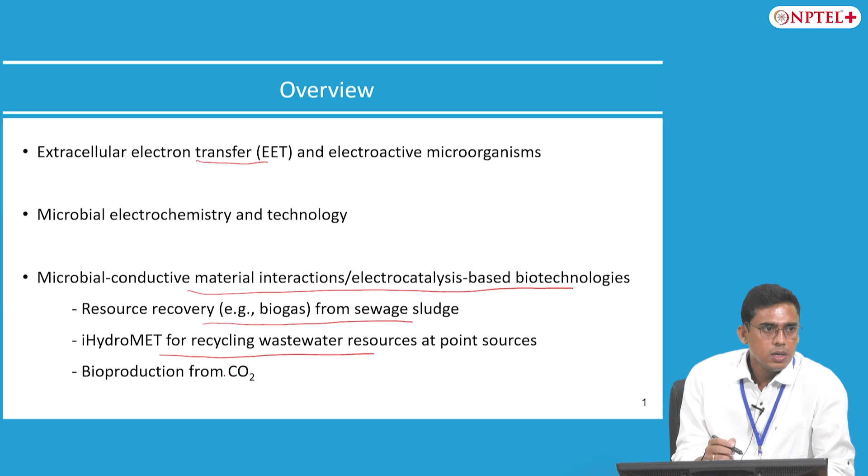So, because when electrochemistry comes into the picture, electron transfer is very important. Now, how is this microbial electron transfer linked to electrochemistry? So, to understand that, it is important that we first try to understand microbial electron transfer processes. So, as you know, the flow of electrons basically is very important to all metabolic processes in life forms, including higher eukaryotic organisms like humans also.

So, in our case, how exactly is electron transfer involved in respiration? The oxygen that we take in is reduced at the membrane level by certain enzymes in order to complete the respiratory processes. Now, in case of microorganisms also, basically they have the advantage of using different kinds of electron acceptors. So, in natural environments, they always try to use the electron acceptor with the highest reduction potential and the electron donor with the lowest reduction potential for maximizing their energy gain.

Now, in our case, we don't have that liberty. We can just respire using oxygen, but microbes can fine tune their respiratory processes according to the electron acceptor that they can access in a particular environmental setting and so on. Now, just a simple example in bioenergetics or in energy metabolism, if you take into account glucose as a substrate or electron donor and oxygen as the electron acceptor, basically this is the common pair in aerobic respiration. So, this is done by most of the living beings, including humans.

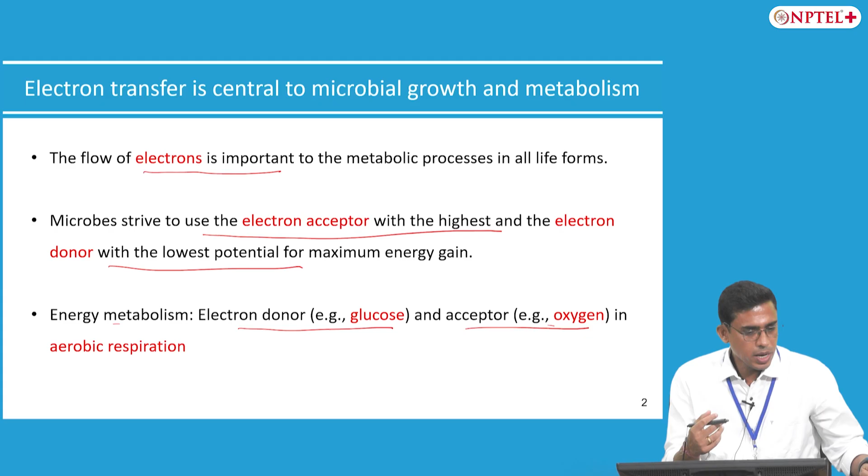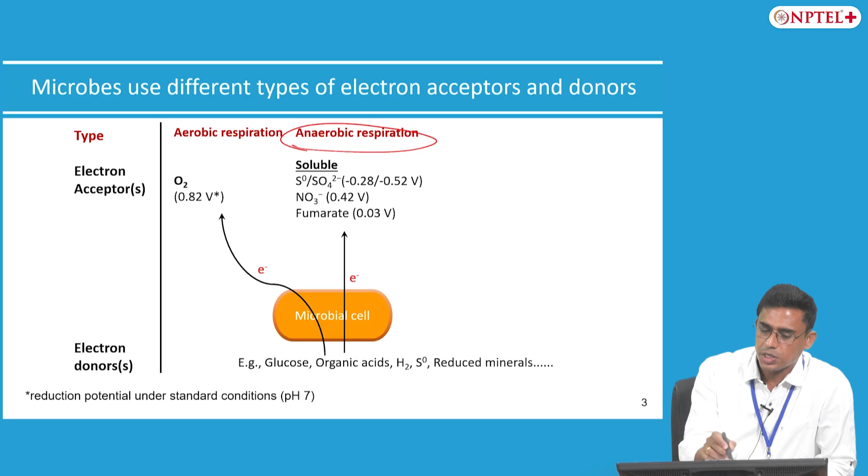We follow aerobic respiration, but microorganisms can go beyond aerobic respiration. So, for example, here I introduce a bit different respiratory process, which is the anaerobic respiration. Now, when we talk about electron acceptors, they can be of soluble nature and insoluble nature. Oxygen is soluble. Now, what you see here, certain numbers, these are nothing but the reduction potentials under standard conditions, pH 7 and so on. And if you pair this with glucose, for example, it has about minus 0.41 volt reduction potential. The gap determines the energy gain for microorganisms, even for higher beings and so on.

Now, in the case of anaerobic respiration, that means when oxygen is not available in certain environments, microbes have evolved to use different other kinds of electron acceptors like nitrate, sulfate, elemental sulfur, fumarate and so on in order to achieve respiration, that means in order to grow under oxygen depleted conditions. But there are certain environments where soluble electron acceptors are mostly absent, or sometimes microbes are unable to find soluble electron acceptors. And this is obviously a very challenging condition to grow.

But some microbes have evolved to even respire using insoluble electron acceptors like mineral oxides, primarily iron bearing mineral oxides or manganese bearing mineral oxides, as well as large organic substances. For example, if you dig deeper into the soil, you will have a lot of humic substances or humus that can also serve as electron acceptors. And even some microbes can respire using other microbial cells. That means the other microbial cell can act as the electron sink for them. Now these are certain unique things which obviously other organisms cannot do.

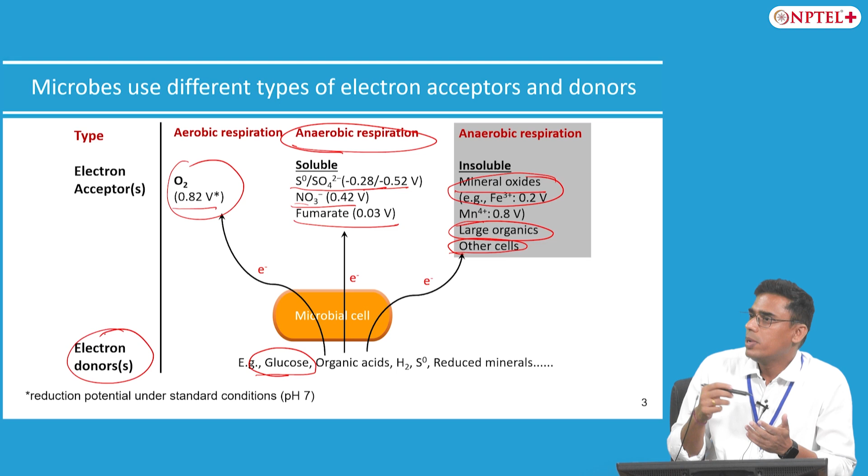Now this is about electron acceptors, but electron donors can also be soluble and insoluble. So for example, elemental sulfur or reduced minerals.

Now here these are oxidized minerals, here these are reduced minerals. So microbes can also use electrons, that means the energy from reduced minerals. Now in order to access these insoluble electron donors and acceptors, obviously microbes need unique mechanisms.

Oxygen or other electron acceptors can easily cross the cellular membrane barrier. They can enter at the electron transport chain and get oxidized or reduced according to whether it is energy gain or energy production. Now in this case, this is not what we can do, because oxygen can easily enter our cells. So to achieve respiration or to use these insoluble electron donors, microbes have evolved unique respiratory processes which are basically referred to as extracellular electron transfer.

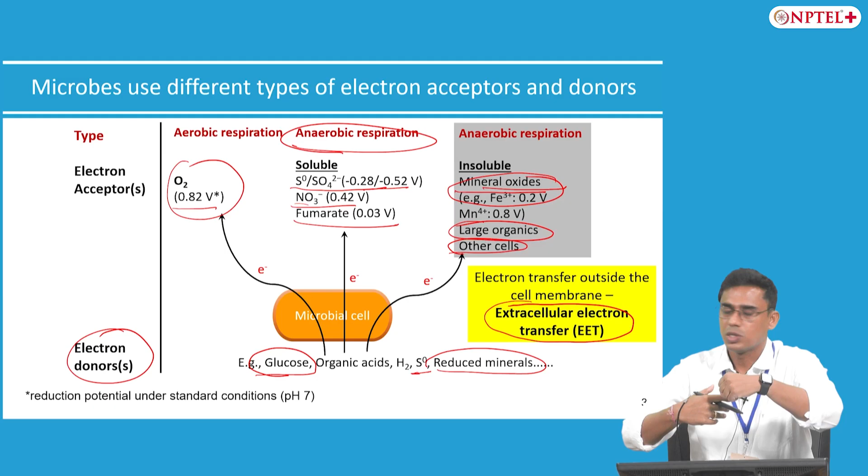So microbes, when they oxidize glucose or any other substrate, have to transfer these electrons outside of the cells. Now this process is referred to as extracellular electron transfer, because electron transport is happening outside of the cells. The reverse can also happen, electron gain can also happen from the reduced minerals or other cells and so on. So this is referred to as extracellular electron transfer.

Now these kinds of processes are very common in natural settings. I have illustrated here a few representative processes where this kind of electrical interplay is very common. So for example, in the first case, this represents minerals, and these are microbial cells. So microbes can use these mineral oxides as electron acceptor to respire. Microbes can use mineral oxides as electron donor to grow. These mineral oxides can also act as an electron conductor.

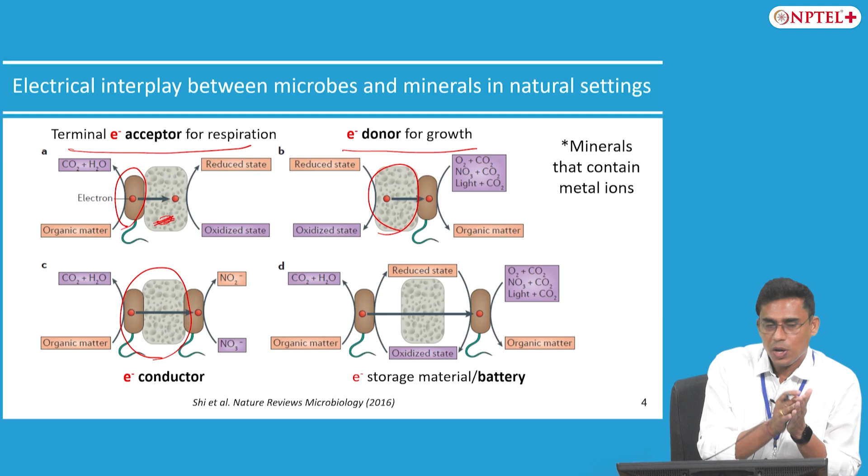That means they can store charge, and when microbes get close to them or attached to them, they can either take the electrons or transfer the electrons. So they can serve as the conductor. And finally, these materials can also act as a battery, because they are storing electrons, storing charge and so on. And when microbes get in touch with them, they can achieve a lot of respiratory processes which otherwise are not possible for these microbes. Now this is very common in natural settings.

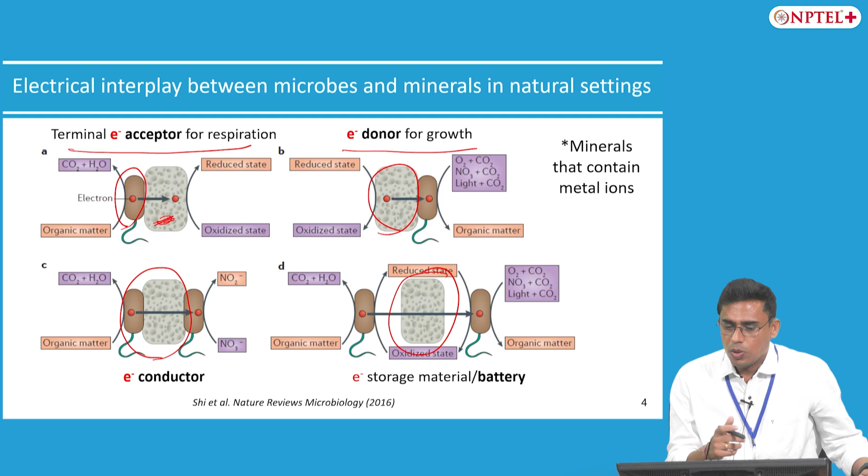Now how about changing these natural conditions in a laboratory or in an engineered environment? So for example, the best way to replace these insoluble electron acceptors or donors, in other words mineral oxides, is to replace them by electrodes or conductive materials. Now electrodes or conductive materials can play the same role, either electron donor, acceptor, or charge storage and so on. And these are the different kinds of electron acceptors, these are donors.

Now you know the electrochemistry. So when you talk about an electron acceptor in an electrochemical cell, it is an anode, and in the case of an electron donor, it is a cathode. So if we replace these natural electron acceptors and donors by electrodes in an engineered environment, we can still allow the microbes to achieve the same kind of functionalities in terms of respiratory processes or different kinds of metabolic functionalities and so on.

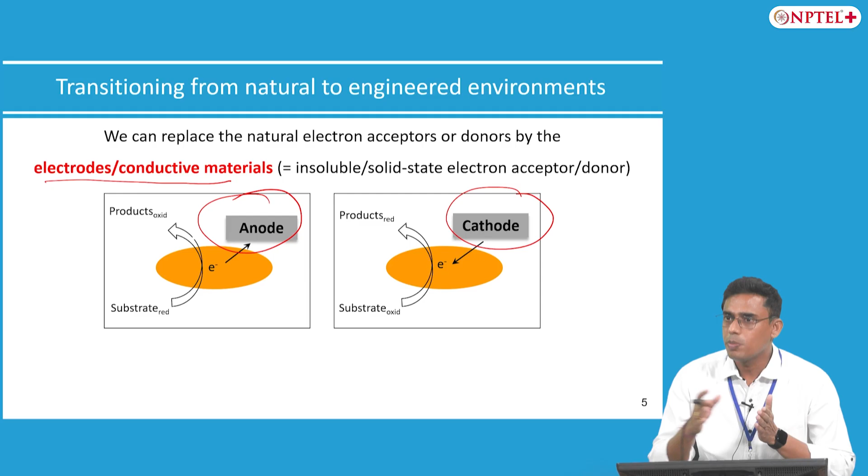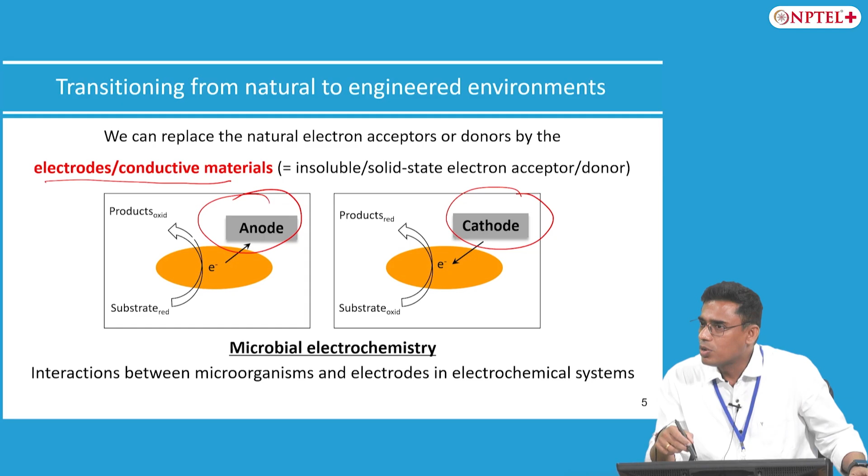Now understanding these interactions between microbes and electrodes or conductive materials or even mineral oxides is nothing but microbial electrochemistry. This field has evolved over the last 1.5 decades. A lot of focus is on understanding these kinds of interactions and also trying to solve some of the basic respiratory questions associated with microbes respiring on mineral oxides and so on. Now obviously for this you need an electrochemical system, which is normally used in microbial electrochemical technologies. So this is just a summary of how we can integrate microbes with electrochemistry.

So this is a simple electrochemical system where you have anodes and cathodes separated by a membrane. It can be a cation exchange membrane or an anion exchange membrane. Substrate oxidation happens at the anode and substrate reduction at the cathode. Now this can be different. Substrates can be of different types in electrochemistry also, and we have seen some examples earlier.

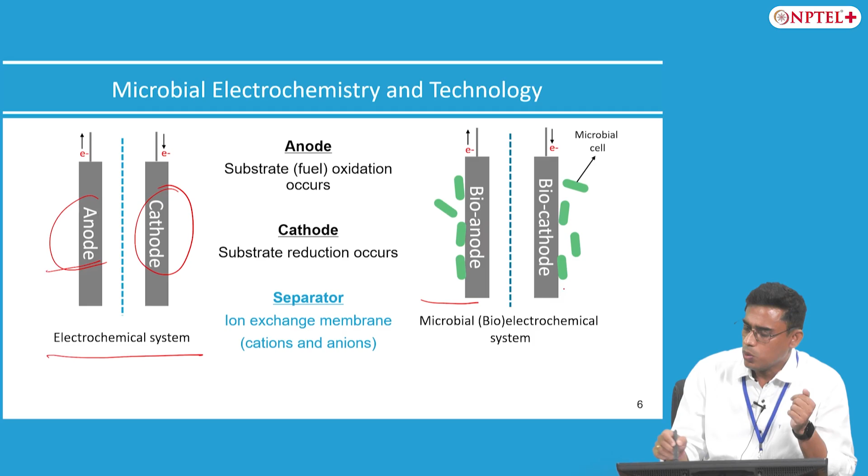Now instead of using a metallic catalyst or some inorganic catalyst, if you use microbes to enable some of the substrate oxidation reactions at the anode, it becomes a bioanode, and some substrate reduction reaction at the cathode, it becomes a biocathode. The CO2 reduction example that I will be speaking about is enabled at the cathode side, because it's a CO2 reduction reaction where cathodes serve as the source of electrons, or it can be used to produce hydrogen and so on.

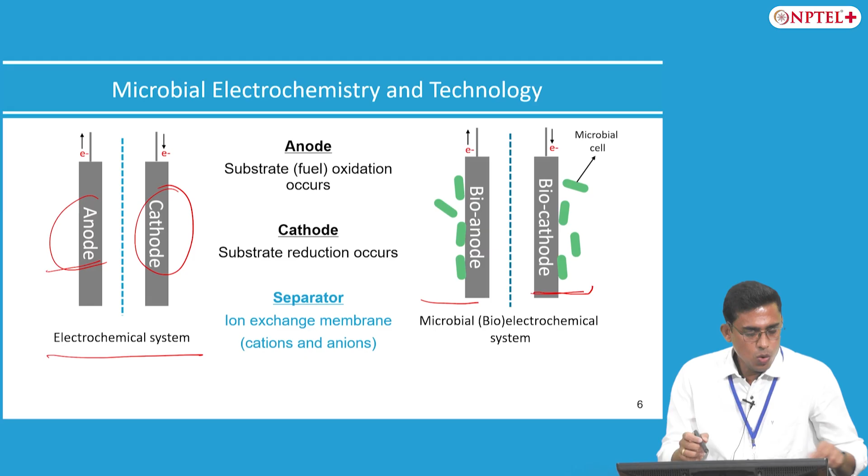Now by just combining microbes with the electrodes, similar to electrochemical systems like fuel cells, you can produce electricity. In the case of electrolysis cells, you can produce hydrogen by putting in extra energy. So similarly, this can be enabled using microorganisms and electrodes.

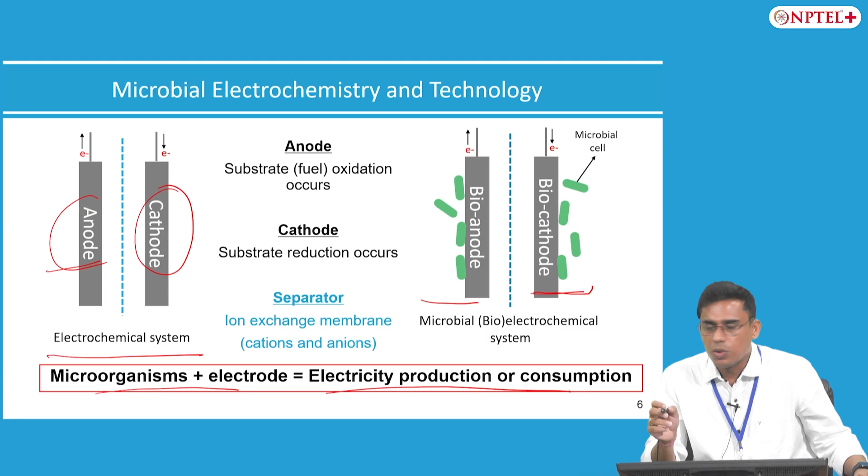You can produce electricity, it becomes a microbial fuel cell, and if you allow some electrolysis reaction, it becomes a microbial electrolysis cell. So that is something enabled using these kinds of combinations. Now the microorganisms which have these capabilities of respiring or using electrons from the cathode are referred to as electrochemically active or electroactive microorganisms, or in other words EET capable microorganisms. That means extracellular electron transfer capable microorganisms.

Now this is applicable to both natural as well as engineered environments. They play various important roles, for example in cycling of various elements as well as interspecies electron transfer. I will speak about these applications also, how we are exploiting these interspecies electron transfer processes in some of the biotechnologies, and they can be utilized to develop various biotechnologies, which I will be speaking about.

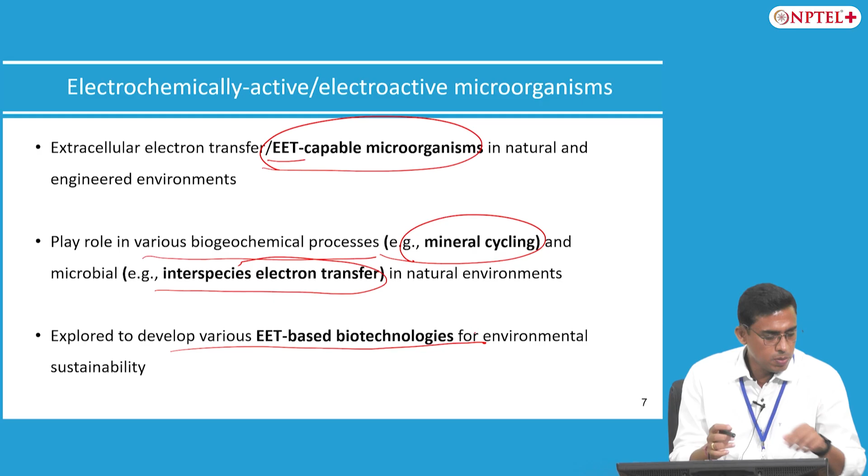Now they can be further classified into two groups depending upon the electron transport. The first one is exoelectrogens. That means when the electron transfer is outside of the cell, in the outward direction to the anode, it is outward EET. Those are referred to as exoelectrogens. And the other way, inward EET from the cathode or from reduced mineral to the microbial cell, they are referred to as electrotrophs.

Now probably you have heard about autotrophs and heterotrophs. The classification is based on carbon utilization. Based on energy utilization, you have lithotrophs, you have organotrophs. So electrotrophs is one of the new additions to that description in microbiology, or in general in metabolic processes, which is somewhat closely related to lithotrophy as a mode of energy utilization.

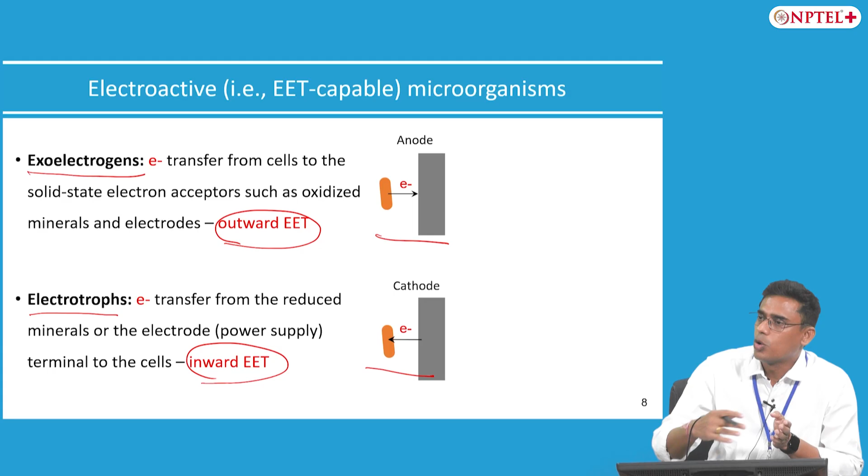Now they can grow on the electrode when they don't find any other electron acceptor in the surrounding, in this case in the growth medium. We ensure that we provide only such conditions where they don't find any other electron acceptor than the electrode. So they don't have a choice. So only microbes which are capable of respiring using extracellular electron transport will be able to go to the electrode and eventually form a biofilm.

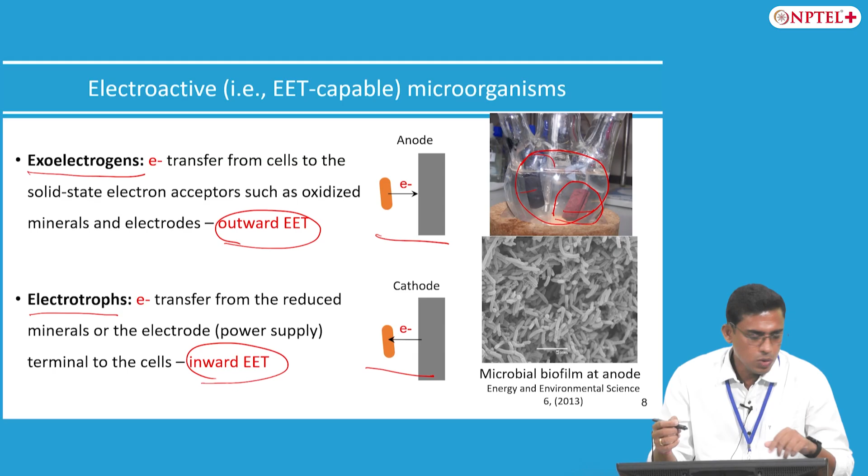Now how do you confirm? This is a scanning electron micrograph where you can see a lot of rod shaped cells growing in that particular biofilm. You have probably seen these kinds of pictures, but mostly for pathogenic microorganisms like E. coli. But these are some very interesting microorganisms which can also grow on electrodes.

Now how do they achieve this extracellular electron transfer? This process can happen via either direct or indirect processes. In direct, the physical contact between microorganisms and the electrode is very important, where they can attach to the electrode and use membrane cytochromes. Somebody had mentioned iron is one of the important components in electrocatalysis. Similarly, in cytochromes, iron is at the center. The previous talk was on inspired catalysis, so that's how everything is linked.

So here, when they attach to the electrode, the electron transfer can happen via cytochromes directly, or they can also form nanowires. Obviously, these are not very big wires, very small wires, but packed with a lot of cytochromes and also some metallic-like conductivity. The debate is going on how exactly nanowires can transfer electrons.

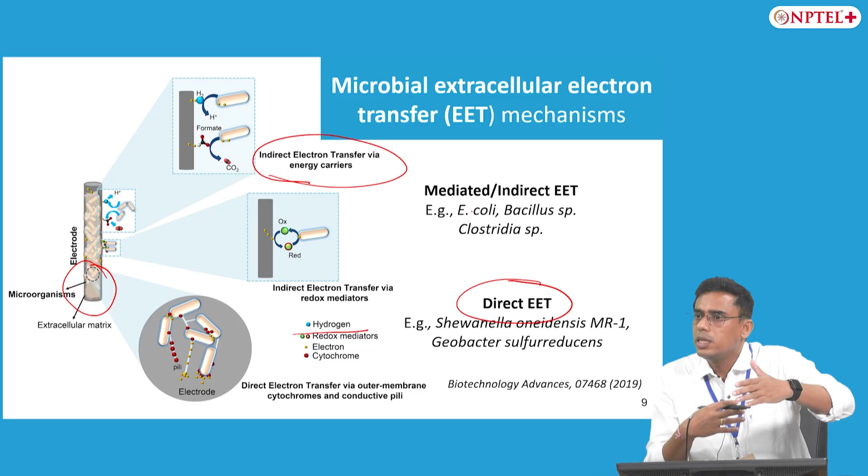And the other mechanism is indirect electron transfer. It can be via redox mediators, or via energy carriers like hydrogen or formate-like molecules. This can happen in different microorganisms. Direct transfer is more promising because you don't have to add anything to the system, and you can have better efficiencies for your target process. But there are some advantages with mediated electron transfer also. The point is basically the electron transfer happens via either direct or indirect processes.

Now, how can you explore these processes for developing different applications? This is just an overview of different reaction possibilities at the anode side, where you can oxidize anything that you can think of, but it has to be microbially oxidized.

So microbes, as you know, can oxidize almost all kinds of naturally available organic substances, and even artificial ones, like in plastic degradation, or a lot of anthropogenic substrates that we are adding to nature. They can also be oxidized by microorganisms.

At the cathode side, obviously you have a possibility of enabling different reactions, starting from just oxygen reduction that will lead you to produce electricity, and the hydrogen evolution reaction, that is through electrolysis. Now in conventional water electrolysis, you have to put in a lot of energy to split water, but in microbial electrolysis cells, that energy can be brought down considerably, and you can link the hydrogen evolution with any wastewater or organic matter oxidation and so on. You don't have to use pure water for the microbial electrolysis process, and more importantly CO2 reduction and so on.

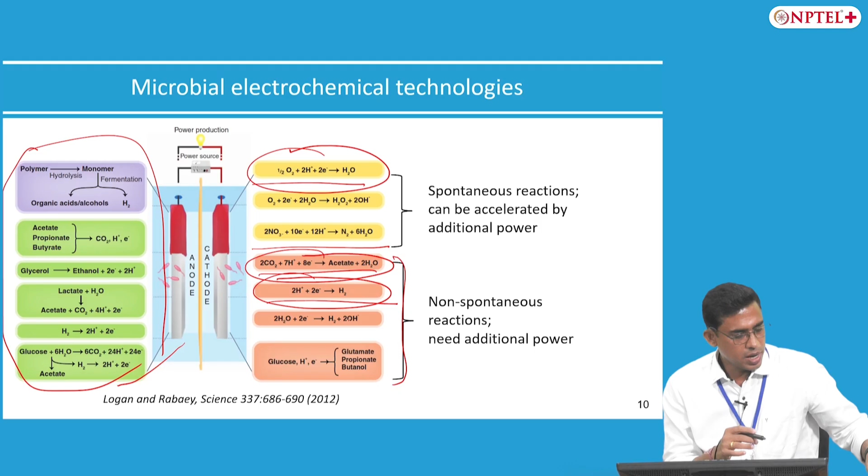Now some of these reactions, in particular the ones highlighted in yellow, are spontaneous reactions. That means you don't have to add any external power, whereas the ones highlighted in the other color are the ones which need external power, which also includes hydrogen evolution reactions. Now using all these combinations, you can think of different applications, starting with electricity or hydrogen generation.

Now the field actually started with electricity production, but now the community knows that electricity production for our regular use is something very challenging, but you can definitely explore these kinds of processes for hydrogen generation and a lot of other applications like wastewater treatment. I will be speaking about one application where we are working on wastewater treatment, recovering different kinds of resources, for example nitrogen, as well as CO2 reduction and bioremediation, biosensing, bioelectronics.

I talked about nanowires. So some scientists are now working on producing these nanowires in bulk, so that you can use them for different appliances and so on. So that is how the field is now evolving. It started with microbial fuel cells, electricity generation, but we have realized that large scale electricity production using this particular concept is not easy and it's challenging. So we are now moving towards other kinds of fields and so on.

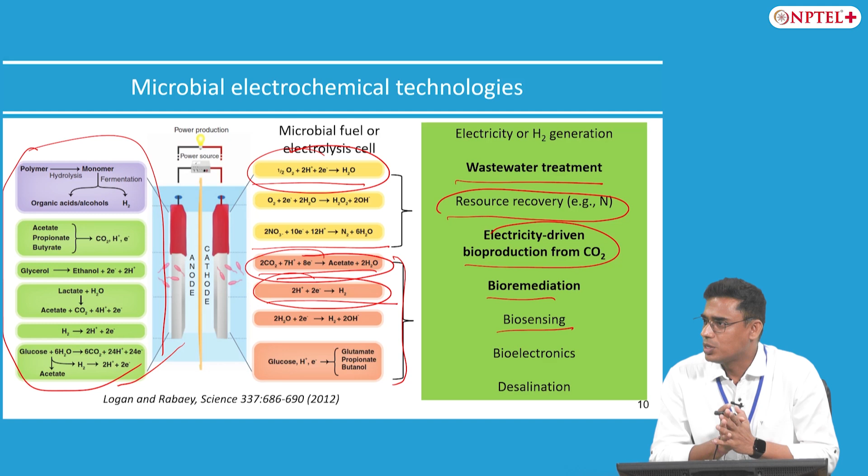So these are the three applications or processes that I'll discuss. The first one is conductive material assisted anaerobic digestion. Second is about wastewater management, and third is about CO2 reduction. Now how many of you know about anaerobic digestion? Probably most of you, or at least biogas plants. So you have heard about biogas plants. So biogas plants, as far as the metabolic process is concerned, it's nothing but anaerobic digestion.

Actually anaerobic digestion happens in biogas plants, which leads to the production of biogas, and it's not a single step process, it's a multi-step process involving the activity of more than 4 different groups of microorganisms. The final one is methanogens, which actually produce methane, which is the energy molecule in biogas. The rest is impurities including CO2 and so on.

So as far as anaerobic digestion is concerned, it is a commonly used technology for managing organic waste, be it your agricultural feedstock or your industrial wastewater coming from food and beverage facilities. Any organic rich waste can be managed by the anaerobic digestion process. Now anaerobic digestion, as I said, is a multi-step operation, but it leads to the production of primarily biogas. And biogas, for those of you who follow the renewable energy sector, is one of the key energies that has been identified by almost all governments, and even the Indian government is focusing on biogas production.

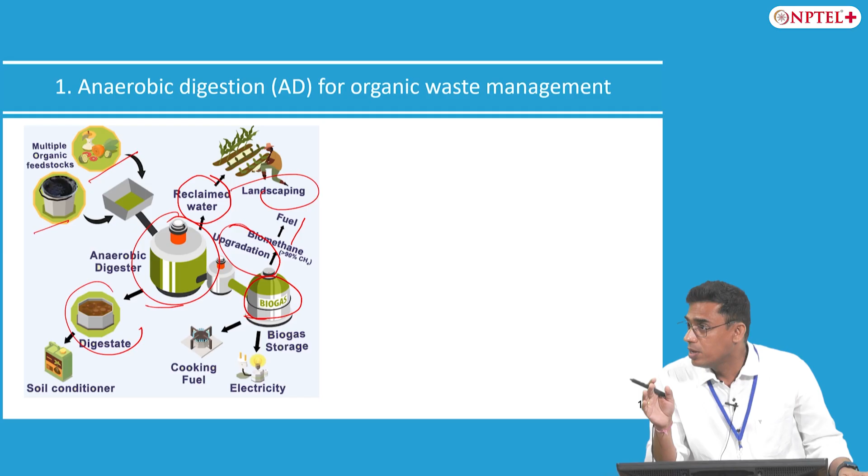Now, as I said, although this is one of the very old microbial biotechnologies, in use for about 100 years, there are still challenges associated with this particular process. Some of the challenges are poor biogas yield, which means the production of biogas is compromised.

The methane content is poor. Organic matter is not completely degraded. More important is slow startup and process stability. Now, to address some of these challenges, we basically thought of integrating microbial electrochemical processes into it.

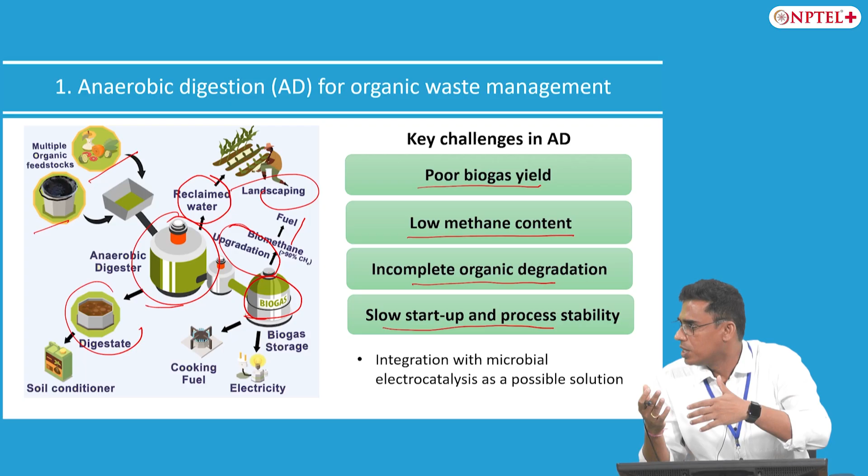That's the microbial electrocatalysis process. When I say microbial electrocatalysis, that means introducing conductive materials or electrodes into the system. So you can either put electrodes in the anaerobic digester or think of putting in conductive material. We followed the second approach because that's easier and you don't have to apply any external energy. We have been developing this technology for the last few years for sludge management.

Now, why sludge management? Those who follow the wastewater treatment industry or applications, most people talk about wastewater. But any organic matter rich wastewater is currently managed by microbial processes only, barring a few industrial wastewaters which contain recalcitrant compounds. Otherwise, all wastewater is managed through microbial processes, and the primary technology used is aerobic microbial technology.

And in aerobic respiration, as I had explained, the energy gain is quite good for microbes. When energy gain is good, they produce a lot of biomass, and here the biomass is nothing but sludge. In wastewater, there are two types of sludge produced: the primary sludge after primary treatment and the secondary sludge after microbial treatment. And sludge management is one of the biggest issues in the wastewater treatment industry, because you have to reduce the volume of sludge if you want to manage it.

Currently the technologies used for managing sludge are either energy intensive or costly. For example, if you want to burn sludge, incinerate it, you have to put in a lot of electricity and so on. That is what most people do. Or you dry it and apply it as a soil conditioner, then you need a lot of land area. And you cannot achieve any resource recovery using existing technologies.

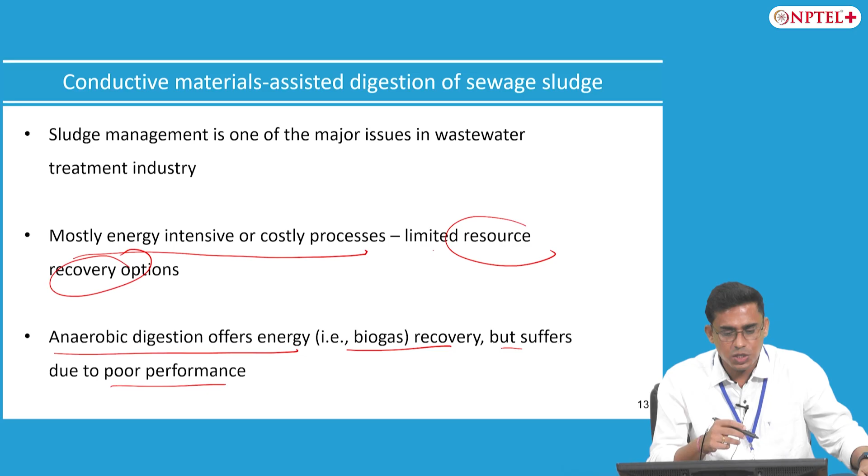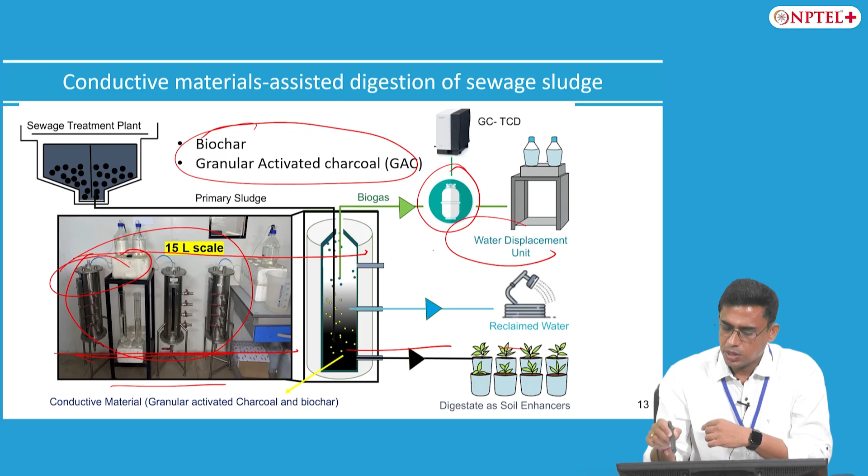To address these issues, we started with very small scale reactors, but I am not presenting that data. Now we are validating the process at a few liter scale. You can see here 15 liter scale reactors fed with sludge coming from the sewage treatment plant on our campus, and we add conductive materials. We tested different combinations and ended up with biochar and granular activated carbon. Our targets are to produce biogas, reclaimed water and digestate. I will speak about all three products.

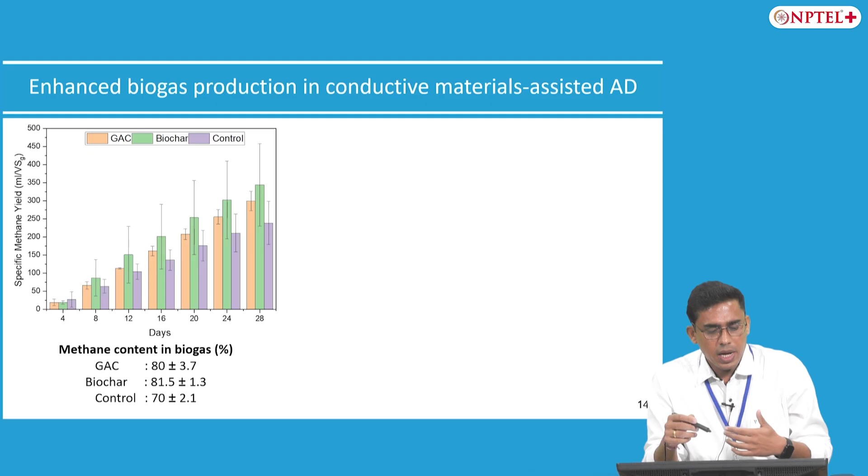In conductive material assisted anaerobic digestion, we have seen considerable improvement in biogas production. You can see data in the form of specific methane yield on the y-axis during the operation of these reactors over a month-long period. In the case of biochar, which is green, and GAC, which is orange, the specific methane yield is always better than the control reactor where you don't add conductive materials.

The methane content in biogas is almost 80% or more, compared to the control, where it is around 70%. In reality, 70% without conductive materials is a bit challenging; it's less than that, but because we have a somewhat optimized condition, you see a better methane content. To summarize, I'll not read all the data, but in cumulative biogas production with conductive materials it is much higher than the control reactor. So there is a considerable improvement in biogas yield.

I also see there is a considerable error bar, especially in the case of biochar data. Any reason? So you mean here the biogas production rate? Biogas production rate. The rate is quite variable actually, because it's long term. The biochar case is higher compared to the others. Is there a reason for you to believe that the biochar case is slightly different? Yeah, obviously the materials are different. We have characterized these materials. What kind of biochar are you using?

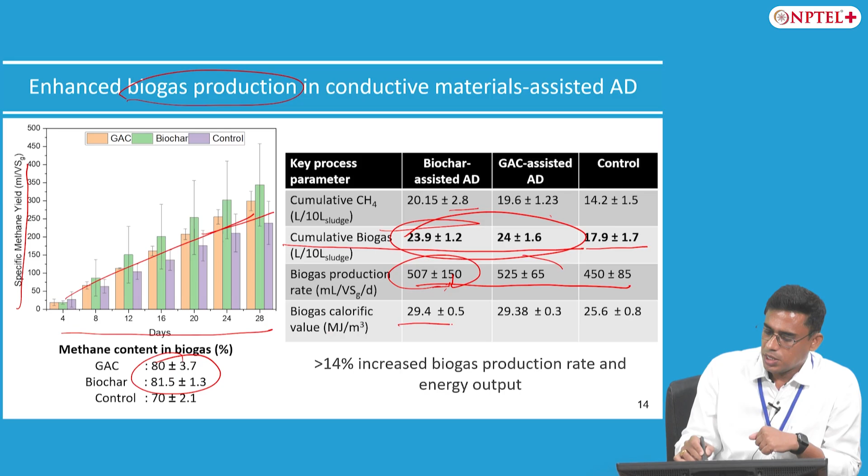you can see there is a considerable improvement in biogas production, cumulative biogas production, methane production, as well as the methane content in it. So overall, if you translate it into calorific value, this is also considerably higher. Similarly, you get better quality reclaimed water compared to the control.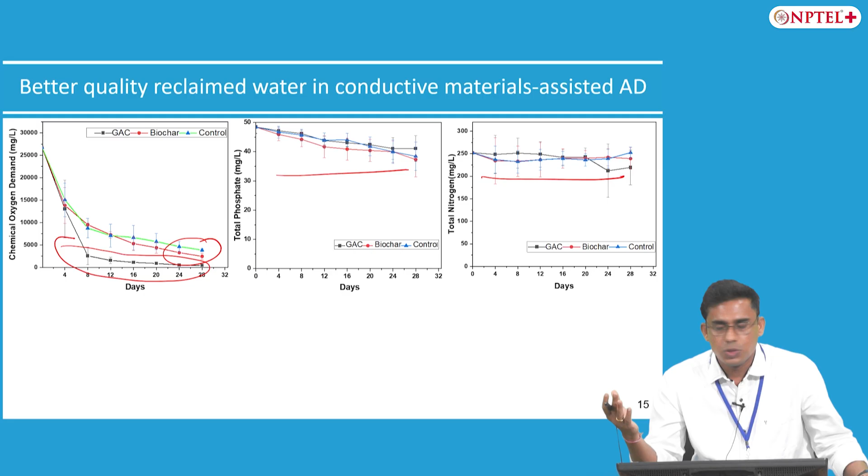So here also you can see the COD removal is quite good in the case of GAC. Biochar and control are almost on par, but the reclaimed water that you get out of this conductive material system is much higher than the control systems. That means the dewatering process is also much more efficient in the case of conductive materials.

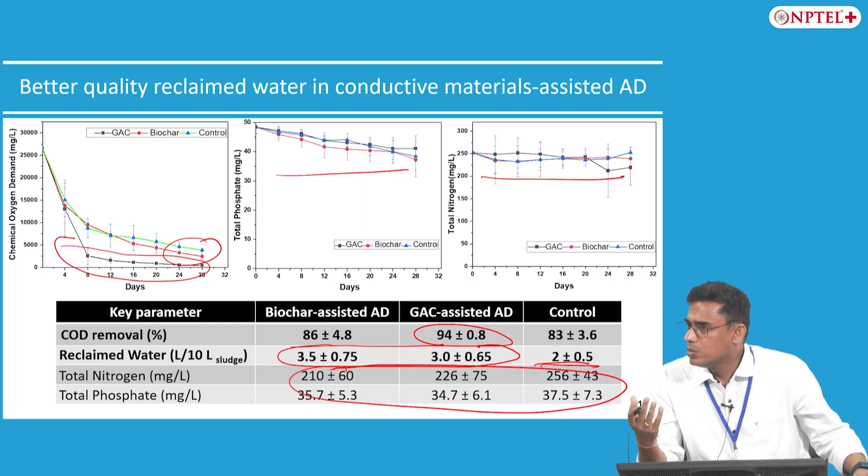Ultimately, you want to use this recovered water for different purposes, and in all cases the nutrients remain there. So if you don't want to remove them, you can use such water for irrigation. So you can also recycle the water from sludge for different applications. And finally, the digestate that is recovered can also be used as a soil enhancer or soil conditioner.

So the point here is that the digestate also has better properties, obviously because of the conductive materials present in it. For those who follow soil science, biochar is one of the hot materials these days for carbon sequestration in soil, enhancing the soil carbon pool, and a lot of other applications. So if you combine this with these kinds of processes, you can also improve the use case prospects. So key takeaways: the conductive materials improve the sludge digestion process through process intensification.

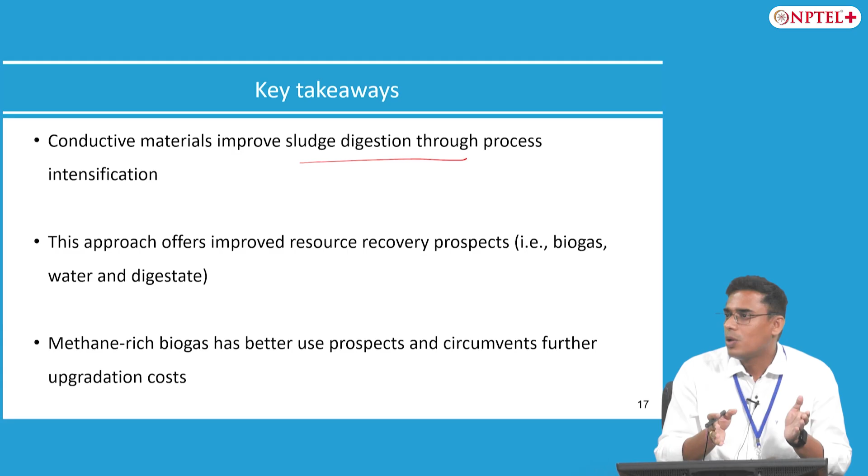So here, just by introducing electrochemistry into conventional anaerobic digestion systems, you can make a big difference as far as the overall process intensification is concerned.

The second application is, how much time do I have? You have like 15 minutes. Yeah, then that is enough.

So the second application is domestic wastewater management at point sources. This is important. Whatever wastewater management happens currently is mostly centralized and to some extent decentralized. An example of decentralized wastewater management is, let's say, this IIT campus. You might have several STPs on campus. We have one huge STP, so you can consider that centralized for this particular campus.

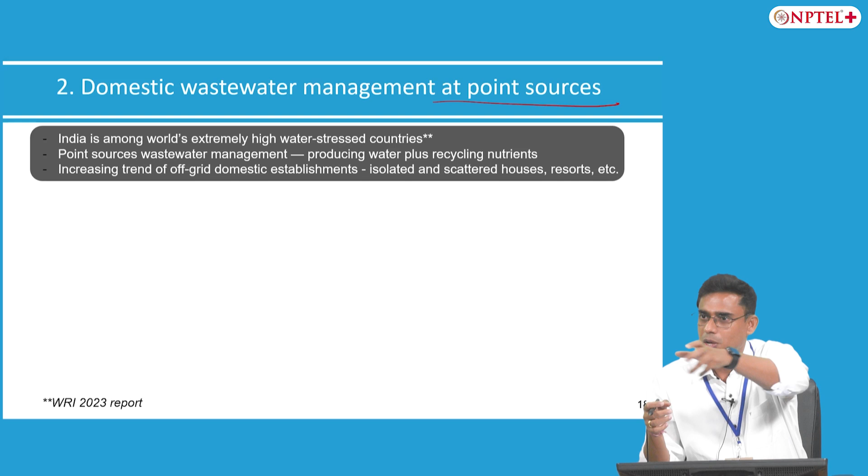On our campus, it's a small campus, Rajneesh has seen, but we have four to five decentralized STPs. Similarly, different campuses can have decentralized systems, but the decentralized capacity is still more than 10 or 20 KLD, and the one you are talking about is probably in MLD, million liters per day. The one I am talking about is further decentralization of wastewater management practice,

and the reason being, India is among the world's extremely highly water-stressed countries, and it is going to be one of the major issues by 2050 if we don't address fresh water use and wastewater recycling problems. And one of the ways to address this problem is to recycle wastewater at the point source itself.

And when I say point source, the source at which it is generated, it can be a household also, it can be this building, it can be a resort, it can be a hotel and so on. And if you go to rural India now, or even city areas, and in particular in the Himalayan region, there is an increasing trend of off-grid domestic establishments. That means people are moving out of the villages and building their houses in their farms or in small pockets, but a cluster of houses and so on.

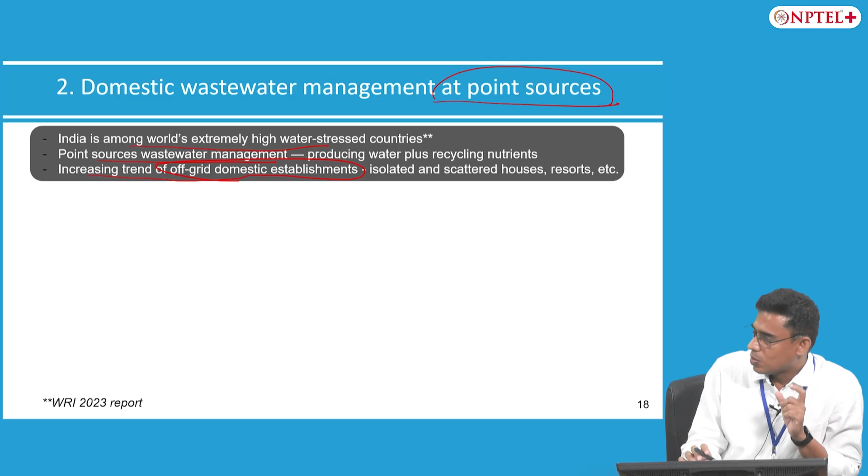Now how do you tackle that problem? How do you manage that wastewater that is produced by small clusters or individual households or resorts and so on? If you don't manage that wastewater, it enters into the environment, it causes various environmental as well as sanitation related problems. Now there is no technology which currently can address wastewater management at such small scale. Whatever technologies are currently available, these are just a scaled down approach based on the existing technologies, but they are highly energy intensive, highly costly, and hardly serve any purpose. They just treat, they do not allow any recovery and so on.

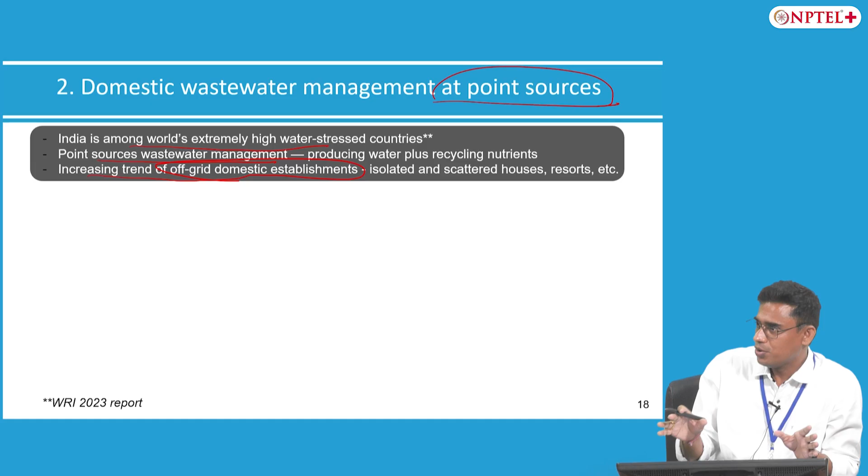So keeping all those factors in mind, we have developed one technology which we have named integrated hydroponics microbial electrochemical technology. Now this is currently at TRL 5, so we are at the prototype stage where we are developing a prototype and going to test it really at the household level and so on. So it integrates a hydroponics component. I hope you know hydroponics, it is very popular these days to cultivate vegetables and so on, with microbial electrochemical processes in the form of electrode assembly and conductive materials.

You put this concept together, and by integrating microbial electrochemistry with hydroponics using this bed matrix, plant and conductive materials, you can enable physicochemical processes like filtration, adsorption, plant nutrient uptake. So if you want to remove nutrients also, the plants will take up some of the nutrients, and various microbial processes, all aerobic, anaerobic, and also the electroactive microorganisms that I spoke about. So depending upon the way you assemble your reactors and operate them, you can enable a combination of processes, which is not the case with conventional wastewater management practices.

And what we are targeting here is to recover nutrients in the form of vegetables, water of course for reuse, and because we are integrating electrodes here, when we operate it in a microbial fuel cell mode, you can also produce some electricity. The electricity is not that high, but you can generate a small amount of electricity just to light some LED bulbs in that area and so on. So that is what the ultimate idea is.

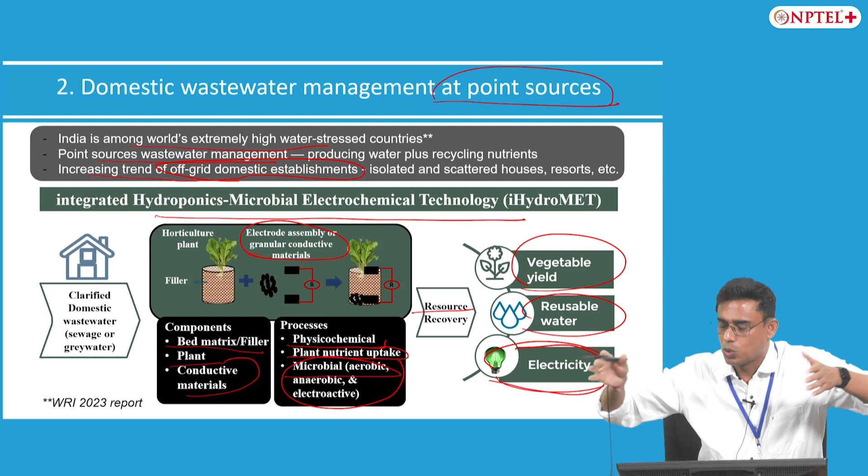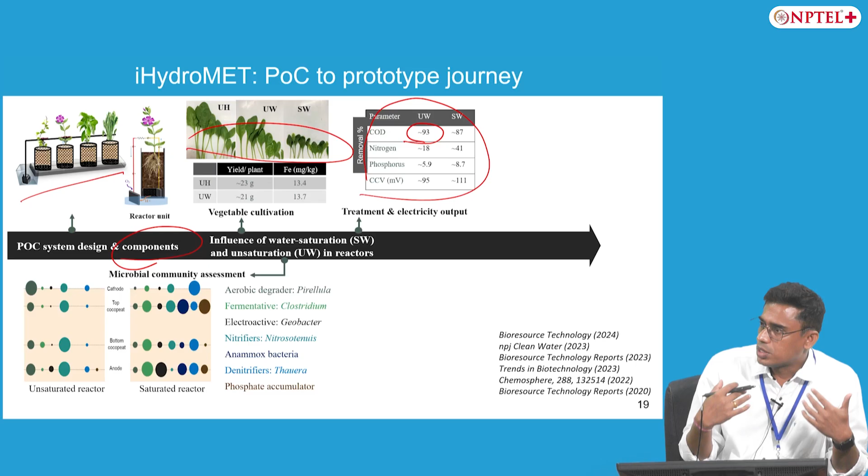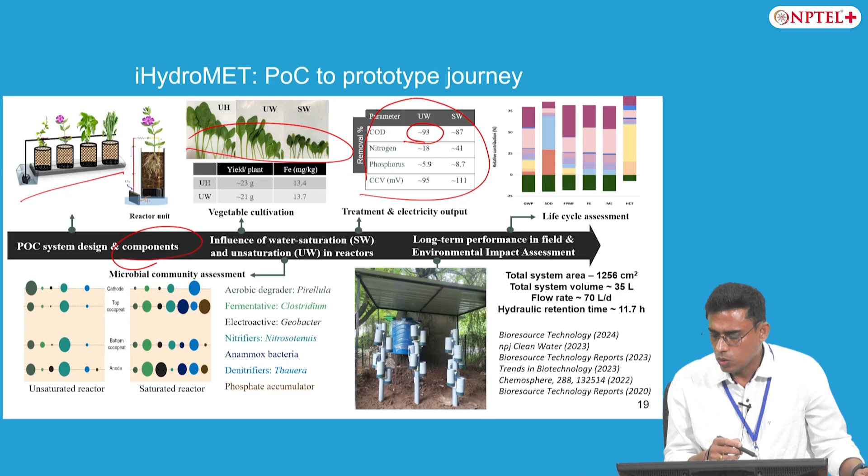I'll share just the field scale data that we have recently obtained, which is actually from the real field systems. So what you can see here, this data is for removal of COD, which is, as I said, the measure for organic matter removal, total phosphorus and total nitrogen. So we had operated these systems for more than a year, so the data is for almost 10 months. So you can see the COD removal is quite stable over a year-long period, and it is around 90%, and this is a very good indicator in the wastewater treatment industry, if you can achieve stable performance over long periods of time without any interruption, and that too in field conditions, that means under summer, winter, as well as rainy conditions and so on.

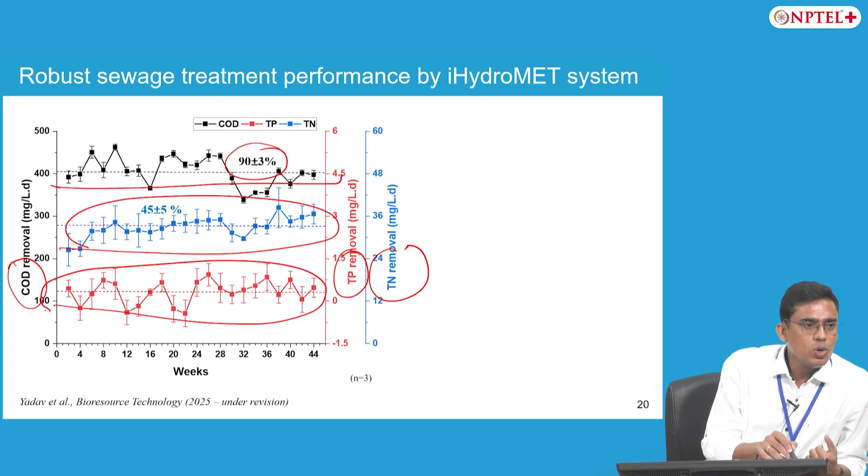The nutrient removal, in particular nitrogen removal, is also quite good because of various microbial processes as well as plant nutrient uptake, but the phosphorus removal is hardly there because this is not a good system for phosphorus removal. If you see here, the removal of COD is more than 90%, TN, and you have certain amounts of nitrogen and phosphorus in the effluent, and if you check the characteristics of irrigation water, it is expected to have these levels of nutrients, like more than 20 and more than 5 milligrams per liter of nitrogen and phosphorus.

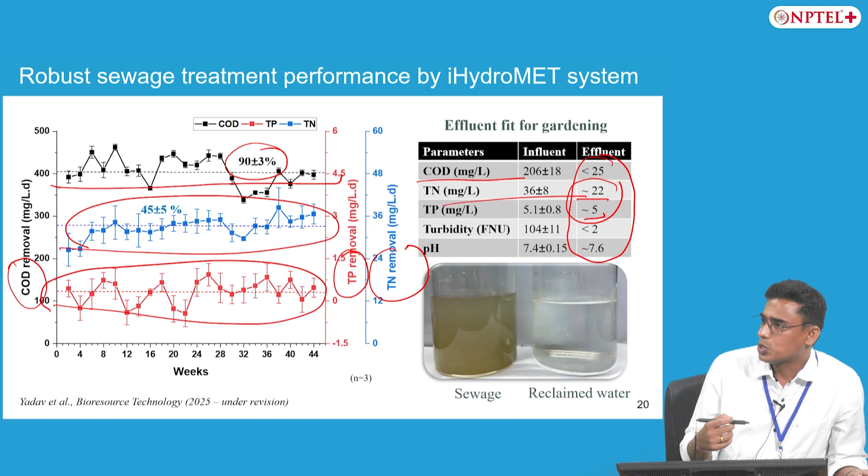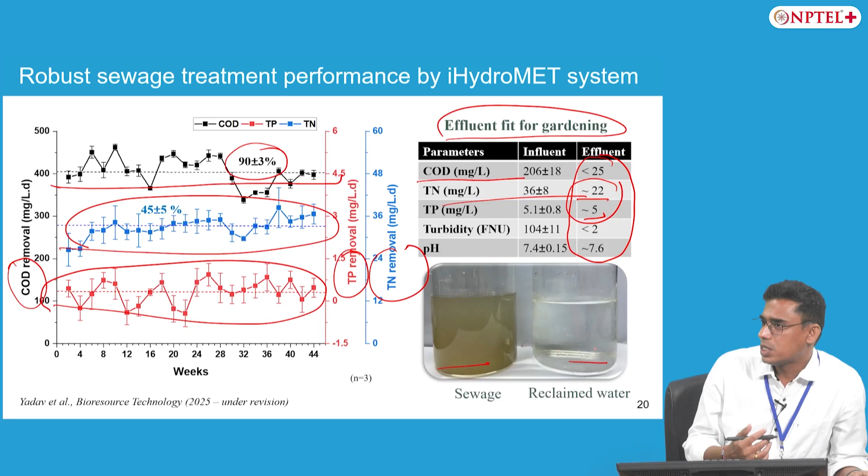So the effluent that we obtain from these systems is basically fit for gardening purposes. Why am I mentioning gardening? Because if this system is meant for households for managing grey water or even sewage, basically they can use this reclaimed water for gardening purposes. And this is just a picture: this is how the sewage looks that enters into the system, and this is the water which comes out of the system after treatment, after around 11 hours or so.

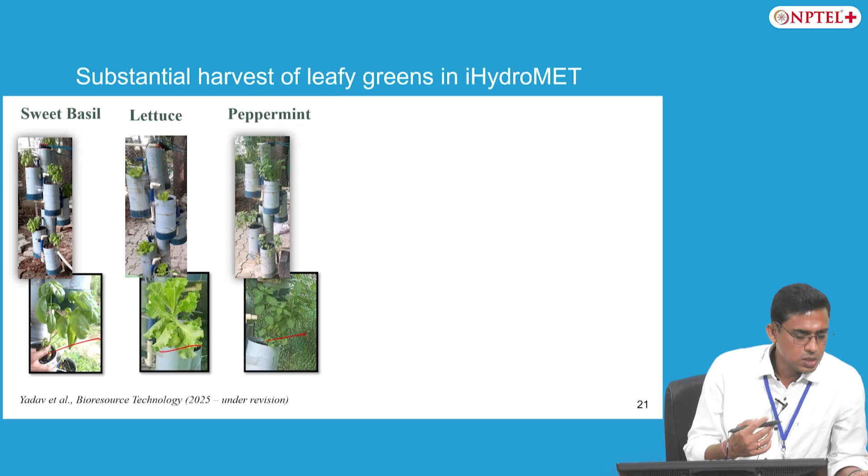This is the data for when you grow vegetables, for example sweet basil, lettuce, and peppermint. So you get very good quality vegetables from this one, and this is not just based on visual observation. We of course characterize them for different nutrients. Just for example, for sweet basil, you can see that the content of iron, potassium, and vitamin A is quite good in the harvest that we obtain from this system compared to the harvest from hydroponic cultivation, where you use a synthetic medium for growing these vegetables.

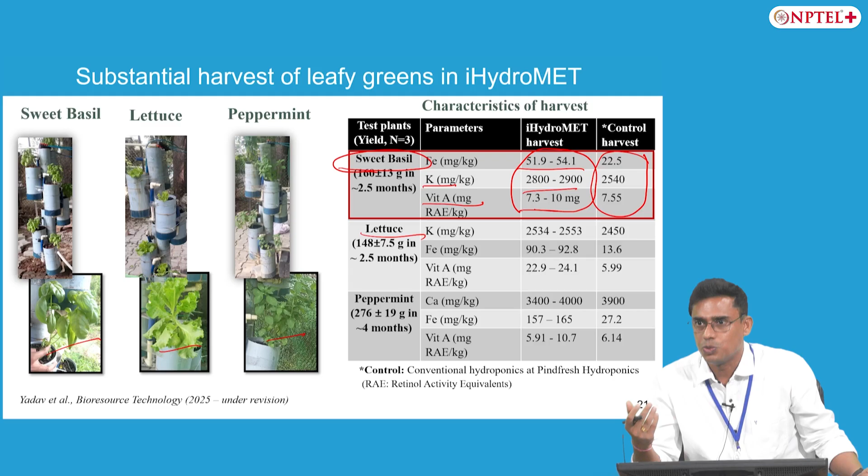So you can see all parameters are sometimes even better. Same for lettuce, same for peppermint, and so on. So even in terms of nutrient quality, you don't compromise when you cultivate with this kind of system. Now there can be a concern of microbial contamination, but these vegetables are not directly coming in contact with wastewater, and you don't know whether the vegetables you currently obtain from the market are good or not. And anyway we wash vegetables irrespective of the source from which we obtain them.

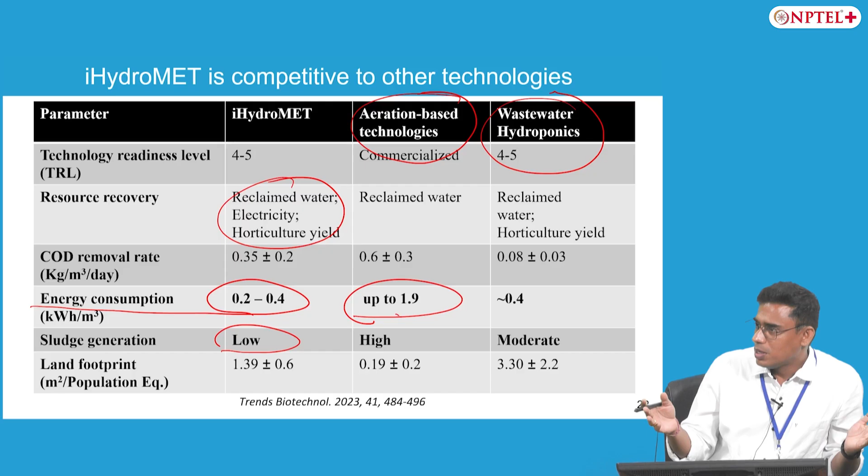The sludge production is quite low in our system, so you don't have to worry about the sludge management problem that I spoke about earlier. Currently you have to manage that because most of the infrastructure produces sludge, but in our system the sludge production is very minimal. So overall we feel these systems are very good for managing wastewater resources at point sources because they offer various advantages. I will not read all those advantages, and this is very much relevant to Sustainable Development Goal 6 and 11, where it is desired that most resources are managed at the point source. So this is our effort to ensure water recycling at the point sources from wastewater.

So the third one that I will speak about is bioproduction from carbon dioxide using microbial electrosynthesis technology. Some of the speakers have already talked about CO2 utilization using various approaches. Sebastian already spoke about a lot of catalytic applications, including electrochemical CO2 reduction. The process that we use is referred to as microbial electrosynthesis because it involves the use of microorganisms as catalyst and electricity as the source of energy to drive synthesis of chemicals or fuels in electrochemical systems.

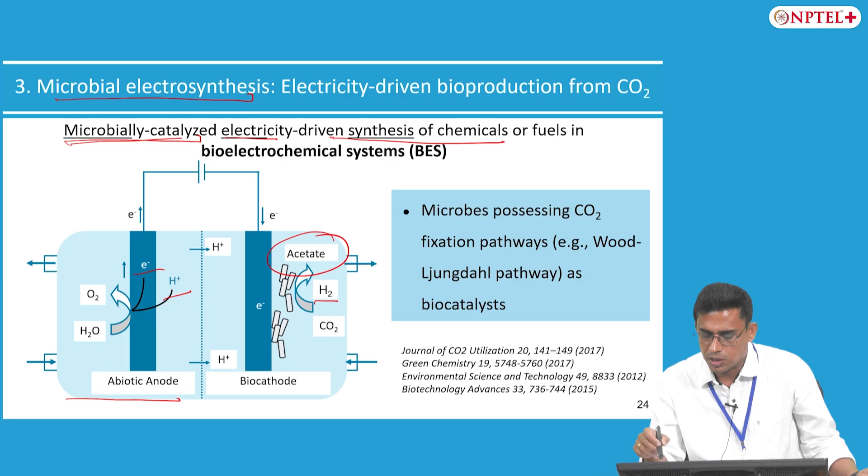Now this is a typical schematic of the electrochemical setup that we use, where we use water at the anode, which serves as the source of electrons. By putting in electricity, you oxidize water at the anode, producing electrons and protons. Protons get to the cathode side, and at certain potential they are reduced to produce hydrogen. Depending upon the potential you choose, either you produce hydrogen or you promote direct electron transfer based CO2 reduction. We are working primarily on acetate production, using specific microorganisms which have the metabolic pathway to convert CO2 into acetic acid. So we stop at acetic acid as far as CO2 reduction is concerned using this kind of biocatalyst.

Now how does it work? It involves electrochemical as well as microbial processes. In the electrochemical processes, depending upon the potential that you set at the cathode, either you produce hydrogen or you don't. Normally at potential higher than minus 0.4 volt, you don't produce hydrogen.

This is the data considering the standard conditions, and below a potential lower than that, you will produce a lot of hydrogen. So depending upon the potential that you have at the cathode, either you will produce a lot of hydrogen or you will not have hydrogen production. Now depending upon what one wants to achieve, you can choose the microorganisms and the process accordingly.

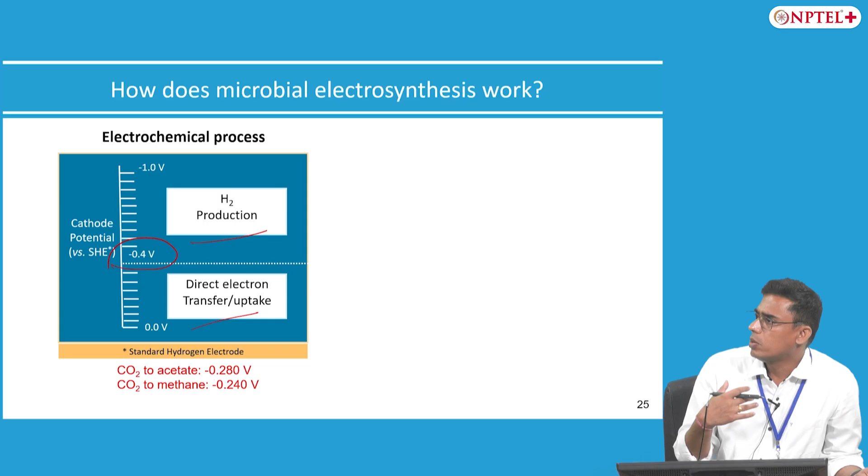So for example, if you want to convert CO2 to acetate, this is the reduction potential; this is theoretical. In reality, you don't achieve that reduction process at this particular potential because of a lot of electrochemical losses and so on. Similarly, this is the potential for methane if you opt for a direct electron transfer based process. Now if you use a microbial catalyst and opt for direct electron transfer based processes, it is feasible, but the yields are quite poor.

So normally we go for hydrogen based production. That means you first produce hydrogen, simultaneously in the reactor, and this hydrogen and CO2 are then used by microorganisms to produce acetate. So these are some of the examples of microorganisms that we routinely use in our systems.

Now one point that I would like to mention, for those who have heard about the gas fermentation process: fermentation is a common process, but it's sugar fermentation or other kinds of glucose fermentations and so on. Gas fermentation is one of the emerging technologies now to utilize CO2 or other kinds of gaseous products like nitrogen and so on.

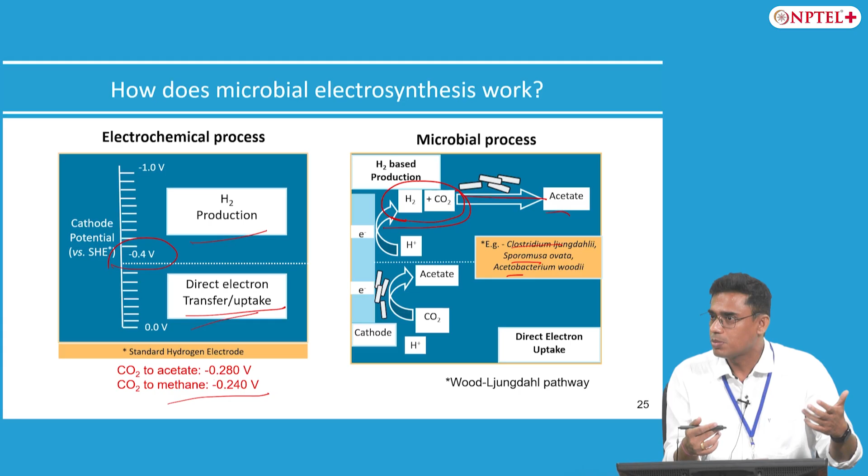So microbial electrosynthesis, in other words, is a combination of water electrolysis with gas fermentation, but both enabled in a single reactor. So you avoid using two different reactors, you avoid using highly pressurized reactor conditions, which is a prerequisite for gas fermentation processes, by having all those conditions in one system. So we have been doing this work for some time now.

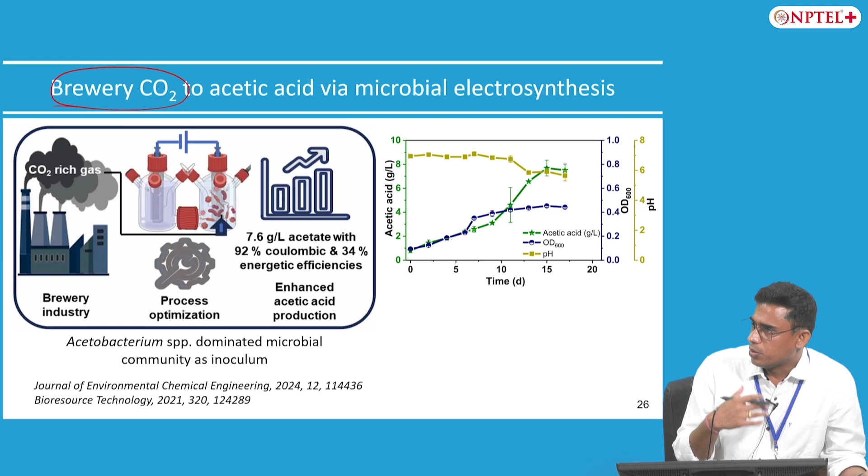We have also worked with industrial gases directly. For example, brewery CO2; I think you mentioned this morning that you don't have to purify it because CO2 is present in high concentration. Even if some impurities are present in industrial gases, microbes can deal with them. Microbes do not get easily affected, unlike metallic catalysts, which can easily get poisoned because of traces of impurities. But this is not the case with microbes. So we have been working with biogas, brewery CO2 and some other industrial gases, and this is data of how it looks when you monitor acetate production and so on.

So now we are at the level where we are testing these processes at a bit higher scale. At 20 liter scale reactors, which we refer to as electrobioreactors, a combination of gas fermentation or fermenters with electrochemistry, which is funded by BIRAC. So we are now testing this process at a bit higher scale. Typical outcome from a 20-liter reactor? This is currently ongoing.

So it's not optimized. But in an unoptimized system, what do you get? We set it up a few months ago, and we are still struggling. You must have an idea, a theoretical calculation of what the outcome could be. See, our target is to achieve at least 20 grams per liter. 20 grams per liter, yeah. And we don't worry too much about Faradaic efficiencies. 20 liters at 20 grams per liter is like 400 grams, so it's a pretty good number. Yes, that's our target. And Faradaic efficiencies are always more than 80%.

Specificity is also not an issue, because these microbes produce only acetic acid. Yes, a little bit of formic acid is there because it is an intermediate in the metabolic pathway, but it is produced transiently and then consumed again. It's a batch process? This is a batch process. Keep in mind, the batch process is always favorable for acetic acid. The moment you change to continuous...

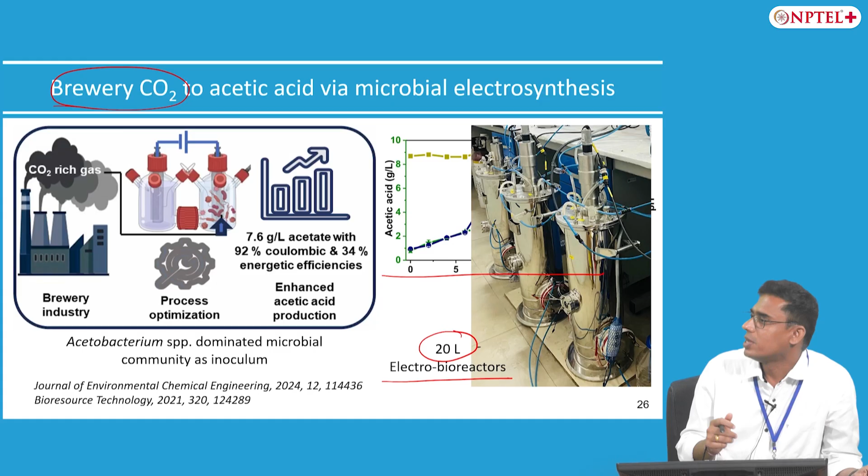So what we do normally, we use buffered medium, high strength buffered medium, which adds to the cost, but there is no other option. The other option is to recover it continuously, extract it continuously. So that is something. In acidic medium hydrogen evolution dominates. Yes, so that's what we see. Eventually, a lot of hydrogen coming out of the system, with time, if the pH drops considerably below 6, when it completely becomes acidic. But we normally tend to avoid that by having high strength buffer medium in our case.

So this system we also use for biogas upgradation. For example, we feed the biogas to the cathode side where the CO2 fraction of the biogas gets reduced and the methane fraction gets enhanced. So for example, from about 58%, we have achieved more than 90% methane content. So this is one of the interesting approaches even for biogas upgradation processes. Faradaic efficiencies are also higher, and this is achieved at considerably lower cell voltage, about just 2.6.

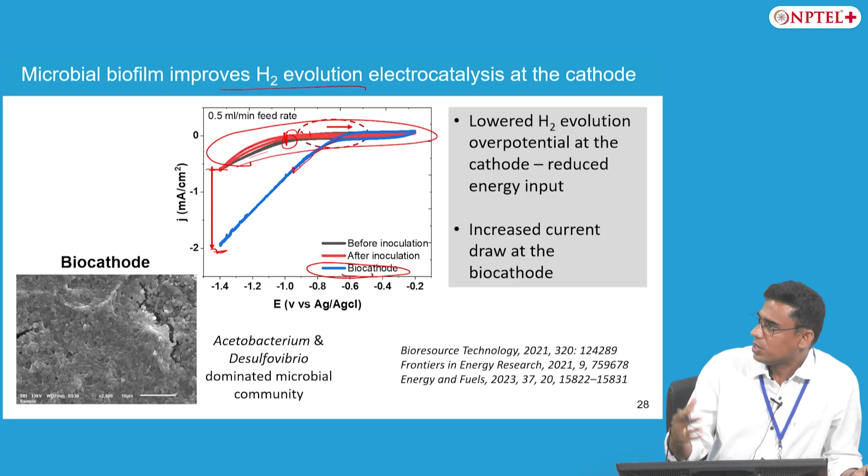Yeah. So this is something we see consistently in all electrosynthesis experiments. With time they also bring the overall energy input down. In terms of efficiencies, that is good, and in terms of cost, that is desired. So at lower energy input, you get this one. Now acetic acid, of course, is a platform chemical, highly desired, but you have to keep in mind that it still has a low value. And another issue is that you cannot compete with the existing chemical catalysis process, Monsanto and so on, very efficient, but of course they are not sustainable processes.

So we have also been working to add more value to the products that we produce from carbon dioxide, and one of the processes that we are working on is yeast cultivation. So Saccharomyces cerevisiae, brewer's yeast or baker's yeast, is something you have heard about. Now we use this yeast, genetically modified as well as wild type, to produce some terpenoids like sclareol and beta carotene. Sclareol is a high value product used in perfumes. Beta carotene is a pigment, also widely used, and also just yeast biomass as a protein source, or as a yeast extract, which is commonly used in research labs and industries all over the world in microbial growth media.

These materials which you are showing are basically the biomass produced by the organism? Yes. It's not a reaction which happens in presence of this? No, CO2 is used as a carbon source. But then, here for yeast we are not using CO2. Whatever acetate is produced in the first step, this is a two-step bioprocess now. So acetic acid is produced first, and that is fed to yeast.

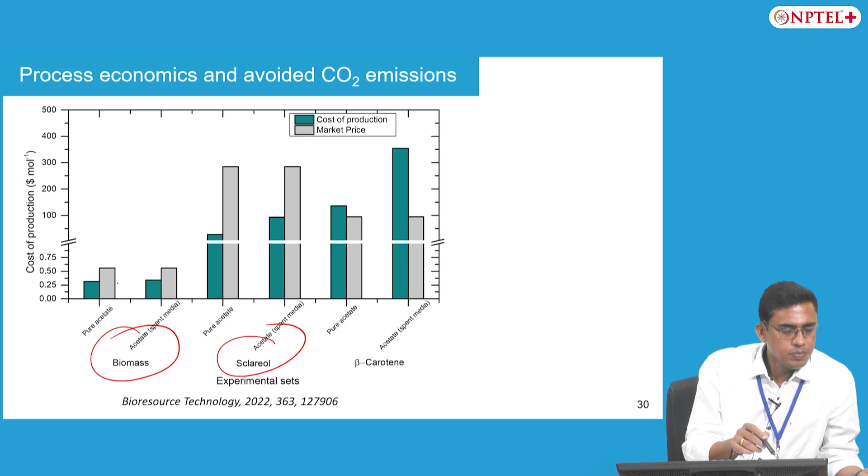Now yeast cultivation is primarily done with glucose everywhere, and glucose comes from energy intensive processes. So we are trying to now produce all those higher value products from acetate that we produce from CO2. And overall it makes sense to do that, for example for biomass and also for sclareol. So we had done some preliminary economic analysis, and here even the previous one, if you are going from CO2 to acetate, that's one way.

Yeah. Let's say you have methane. Yes, methane. That itself is a lot more value addition. Yes. So it may not be CO2 utilization, but it's like gas to liquid, gas to solid kind of.

It's already happening. A lot of these things are basically... Yes, but is it easier to control the size of the molecule through this route? For example, he talked about aviation fuel. It may not have that sustainable word if you don't use CO2, but if you use methane to convert that into aviation fuel, it's actually synthetic aviation fuel. So is it doable, or how easily is it controllable?

That's the main point. With all gaseous feedstocks, of course, it's not that easy, in particular if you talk about hydrogen. Not hydrogen, I'm saying methane; hydrogen is very expensive. Methane is much cheaper. If one can do that, it is going to be really a game changer. Yes, Rajneesh, what you're telling is absolutely right. We don't need big molecules. First, we need methane.

Methane. From 6% to 15%, we want to increase the target by 2030. Our gas penetration should be from current maybe 5% to 15%. That is a huge number. We are putting city gas distribution networks everywhere. So the first molecule is methane, at least for the energy problem. There's even a lot more value addition.

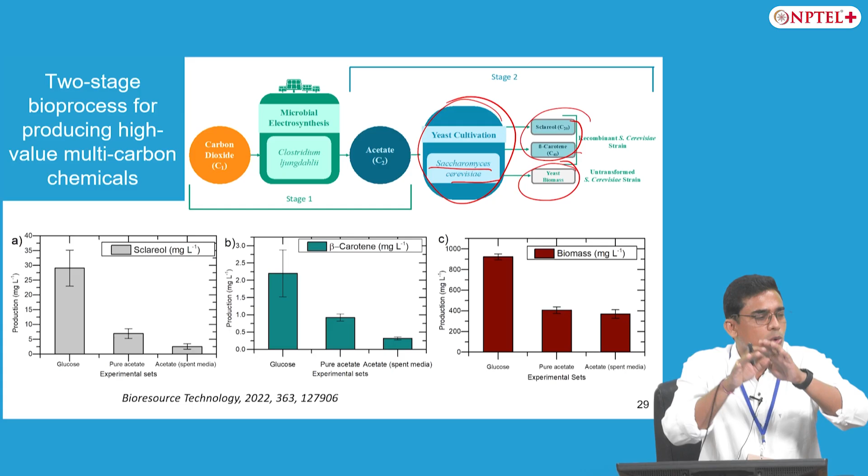Okay, so biogas means methane along with CO2. In this mixture, CO2 will be converted, enriching methane. Methane will not be used, because you will not be using methane-utilizing microbes here; you will be using methane-producing microbes. Now, why we are also integrating conductive materials is because you can do that in one reactor only. There you will not increase the methane content beyond 90%, but considerably higher than the normal scenario, so you can still achieve better use case prospects. But that is also possible.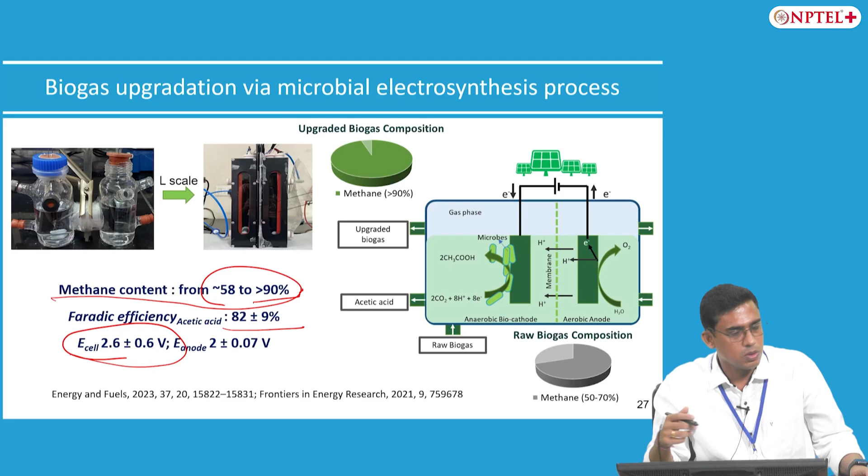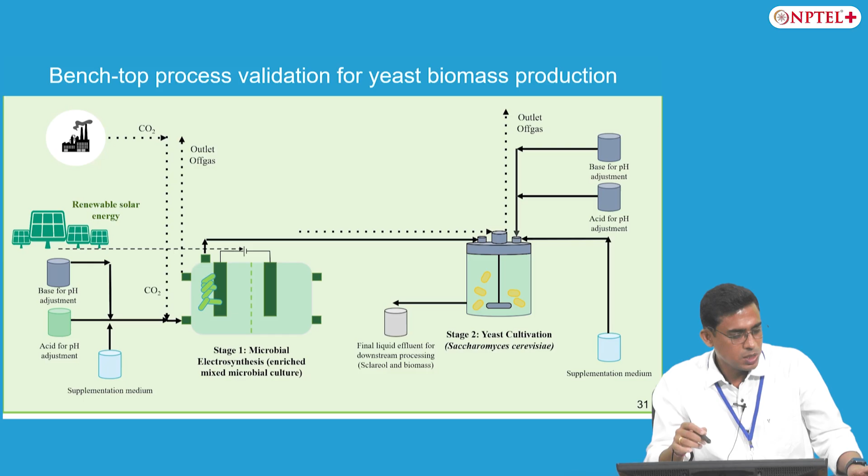So this process is feasible economically. We have been developing a higher scale process for yeast production. This is the first test, and this is how it looks when you dry it. Our calculations show this process allows yeast biomass production with around 2.6 times lower CO2 emissions and 1.2 times lower cost than conventional glucose-based process. This is the project waiting for funding from DST, where we want to scale up this process. No one has got the funding yet? I think 2-3 people have got it.

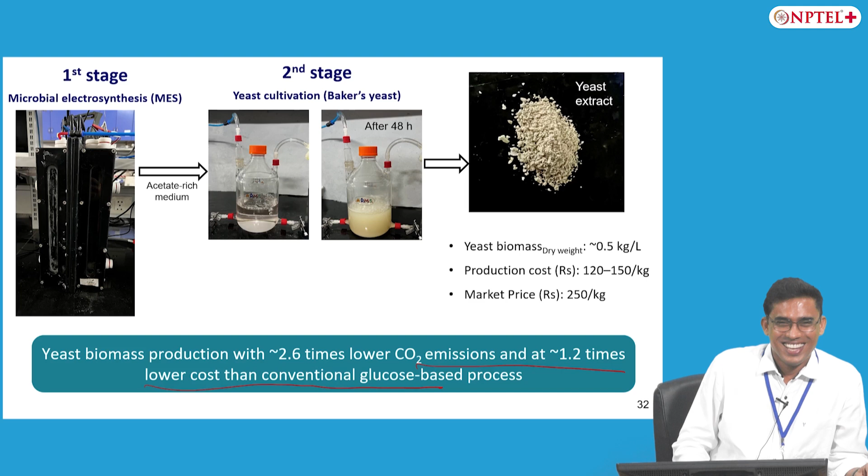All right, I will skip the summary. I hope you got something out of the presentation, that you can try to explore such combinations. This is a unique combination, microbes with electrochemistry, to do a lot with conventional processes as well as try to develop new processes.